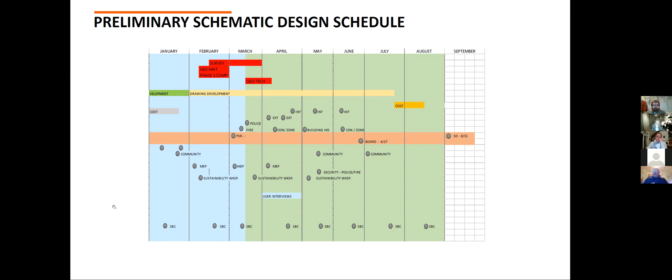I sent Brian an email with another type of chart, which based on Diane's comments earlier, is going to be the right kind. It gives you a week by week time and event calendar, and tells us who we're going to meet with, what the activity is, and who's responsible to be at that meeting.

Can I ask you a question? Are there any issues about getting on the site since we don't own it? I'm presuming I shouldn't be digging holes, poking around, or putting a drilling rig on the site without the owner's approval. Do we have any indication of the owner's receptiveness to that?

None that I'm aware of, to my knowledge. Okay, so that's definitely going to be an area of focus for us - we meet with a subgroup over at City Hall on Mondays.

That's going to be part of getting some sort of written agreement that allows us on that site - that's plan A, and plan B is basically talking to some lawyers. But one way or the other, we're going to find a way to get on that site in the coming months.

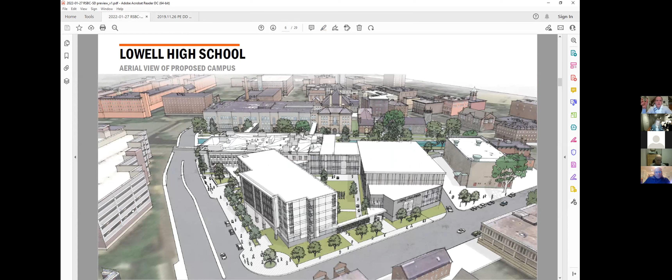So we went through with you guys, we have basic massing. What we start to do from that is refine the massing, get into fenestration, look at where openings are. Then, if you want to go to the next slide Brian, start to look at landscape opportunities, and start to isolate and look at pockets within the landscape.

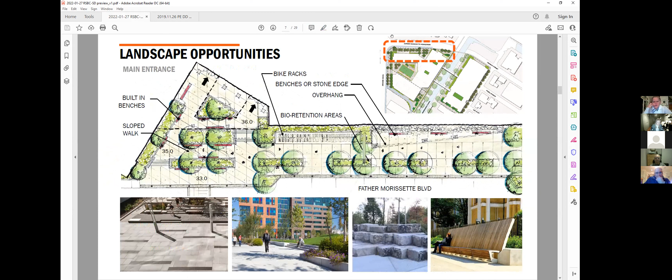I would encourage folks - a lot of times we hear good ideas from people on building committees, examples from other schools, examples from colleges you might be visiting with kids or something.

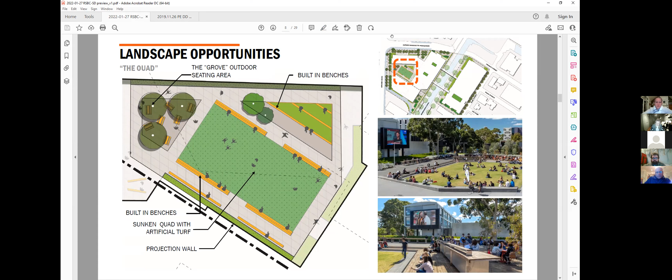So get photos of things you like, especially you folks who are going to be in that school every day, in terms of what works for schools. Perkins Eastman has a ton of ideas, and there's a lot of directions we can go, but if there are examples of things you like that you see out there, get some photos and send them to the team, and we'll find out how to incorporate them. Great point, Brian. Lots of ideas from building committee members and community members have been woven into our design. So yes, by all means, send everything you have along.

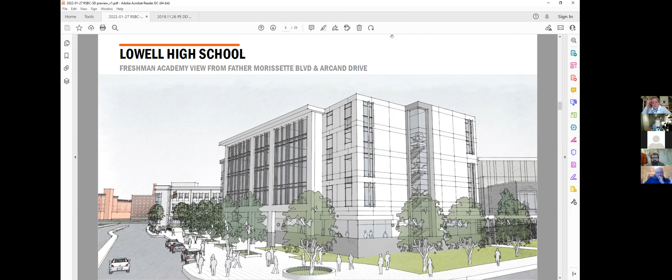So moving on from landscape, we start to look at fenestration, and in this particular case we were looking at exterior materials. This is a general rendering. As we think about materiality and what the building wants to look at, we always look at precedents. I'm already pulling together precedents from Revere, and that'll likely be illustrated in the next meeting.

So then we start to look at what the actual materials are. We rate them based on durability, cost, maintenance, life cycle. You'll find when we get to the interiors, that'll be true for those materials as well. In this particular case, some of the bases we were looking at - the base of the building, the lowest level - we were looking at brick, simulated stone, CMU. We look at the durability, the estimated cost per square foot, and talk a lot about the maintenance and how easy it is to clean, whether it graffities easily - those kinds of topics.

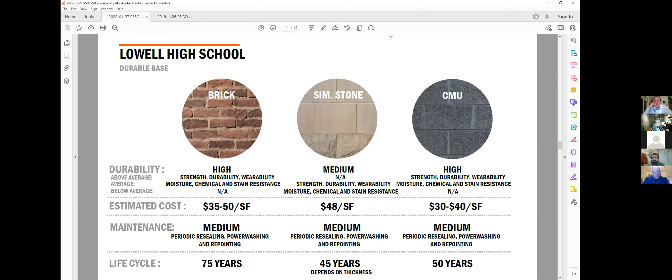We also looked at some other facade materials and gave examples of those. With those materials we talked a lot about what they are and how they perform. What we did was look at what that actually visually looks like in that same rendering I showed you earlier, which was just kind of a white and gray.

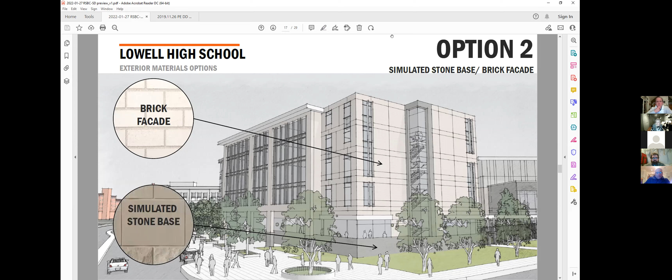So in this case, brick facade - spoiler alert, this is what they chose, but we gave them other options, and we had other renderings throughout the building so they could see the different buildings. I think we gave them three options - this one changed the base, and the next one had a different phenolic up top.

So we talk a lot about what the materials are, how they perform, what they cost. We had a baseline here that we carried assumptions in PSR, kind of like what we were doing here. And then we were asked to look at the cost relative to that. Option 1 was substantially - you can see it was $200 some odd less expensive than the assumptions we made in PSR, and that's actually the direction they ended up moving forward with. So just again, comparisons talking about materials - this led them down that road with some additional information that I took out just for the sake of walking you through this.

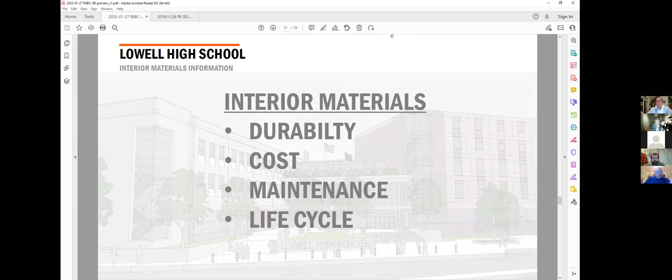So then we went on to the interiors, and similarly we looked at those same comparables for each material. In this case we start to lay out what it is per space. We look at typical classroom finishes - what are we proposing? In this case, acoustical ceiling tile, painted gypsum wallboard, and linoleum floors. And how do they function, how durable are they, what are the estimated upfront costs, and then the maintenance of all of them. We keep and try to update these.

We have a whole spreadsheet that keeps current costs of everything, and maintenance updates as we learn from each project. So in this case, here's the classroom. Brian, if you want to move forward.

Typical corridors, we added lockers in. We're still proposing linoleum floors there.

And then the next one I think was their gymnasium. So painting the structure. We had CMU walls, wall pads, some Tectum panels up high on the walls, and then sports flooring, both wood and they have a track.

So again, looking at all the same comparables. And then lastly, Brian, at the end of schematic, we put forward, and this was true for a few different key spaces throughout the building, but you can see how those materials were envisioned for their particular gymnasium. So lots of discussion about materials, lots of talk about cost, and then some visuals to go alongside of it.

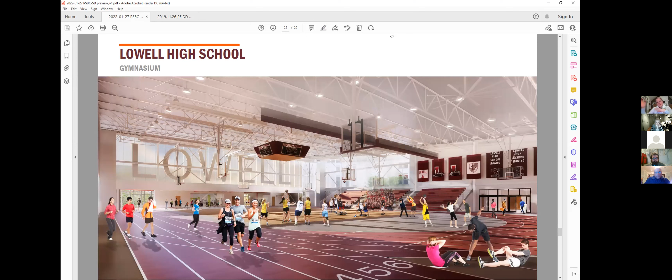And then this is something we did in Lowell, and I talked to Brian and Dan about planting seeds early to start to think about this. Experiential graphics are really important because they build community and student pride throughout the building.

So if you move forward to the next, there's a lot there. This is 622,000 square feet. But what came of it was our graphics team not only did a signage package for basic signage, but also all these different Lowell specific graphics to build student pride.

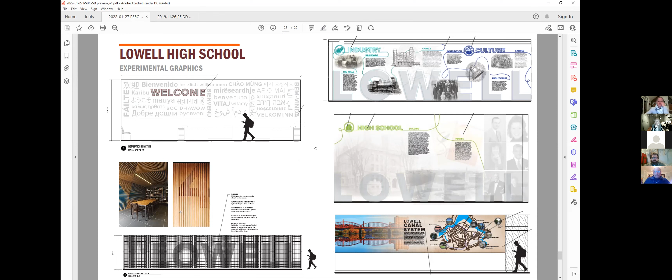That was basically what we had for tonight. We're going to be putting our head down and really working on this report for the next few weeks. We'll be laying out a lot of these next steps in detail, but just wanted to introduce some of the high level things that are coming.

If there's any questions, we can check for them right now. I don't think I see hands. No hands. So let me just double check the agenda.

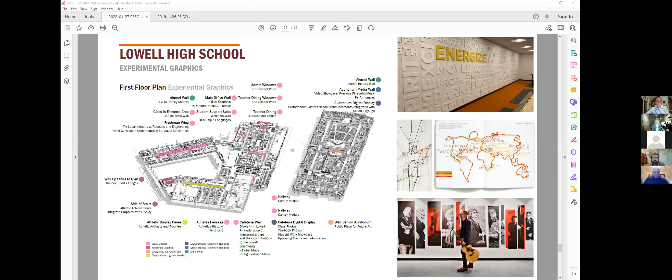I don't think we really had anything else to go through tonight. As I noted, I think we'll confirm via an email, but I would ask the committee to plan on, let me look at my calendar, the 17th of February and the 24th of February. We might ultimately only need one of those, but if we could hold those 2 nights, we're going to spend the next 3 weeks really focusing in on this report and launching schematic design as we talked about tonight.

Brian, just to let everybody know, I'll send out those meeting invites today so that they're on everybody's calendar. I'd rather have them on there and be canceled versus the opposite. Agreed, good idea, thank you Linda. Yep, I'll send that note out right after this meeting.

Brian, the 24th is school vacation week. I don't know if that affects others, but I know I'll be away that week. I don't know if Diane or anyone from the school is taking off for some time, but it's something to think about. That's a good point relating to the school schedule.

Yeah, we might, if it is going to be 2 meetings, have the first one be the longer one, we'll have a little more content to cover. The second meeting, I always just wanted to tuck in before March 2nd, simply to get a motion to submit the PSR. So we need to get the PSR done, we need to get a draft to you to look at.

But we do need a meeting. If that week of the 21st through the 25th becomes bad, we might just look for a quick meeting on the following Monday or Tuesday, since these major submissions to the MSBA are something that we feel need to come along with a motion to submit. We can always at least put them on the schedule and then check on a roll call to see if we have enough people on the 24th that are not going to be traveling. At least we can get the motion through. So we'll put it out there and readdress as we get closer to those dates.